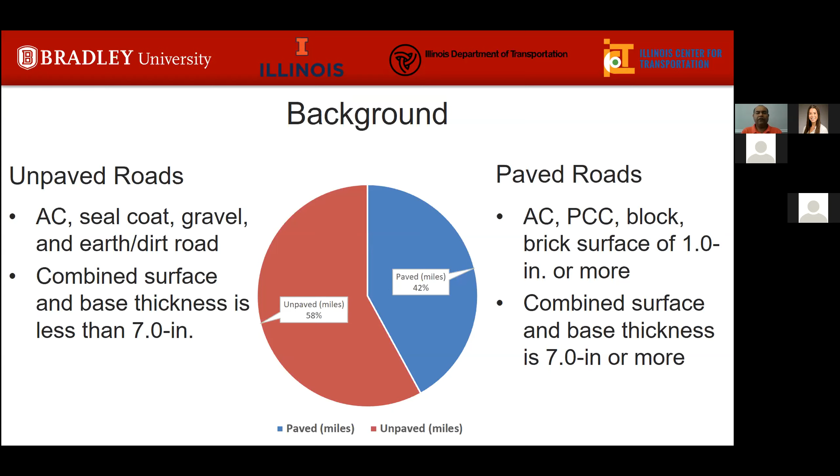If you look at who is maintaining those unpaved roads, mostly county, township, and municipalities are maintaining and taking care of them. About 60% of the unpaved roads are maintained by the townships and municipalities. Just for background, the county engineers actually hold an engineering degree. On the other hand, the township highway commissioners, who are in charge of maintaining the roads, do not necessarily have a technical background, and they are elected. Many of the highway commissioners are retiring and new faces are coming in. So not all of them have the experience or technical background to maintain a road. So this is also a challenge on the highway commissioners front.

So how do they actually evaluate their roads? We did a survey throughout the state for both counties and townships, and we were surprised that most of them do windshield inspection. Basically, windshield inspection is a county engineer or a highway commissioner driving their truck, looking through their windshield and trying to subjectively understand whether a pavement is in good, fair, or bad condition. On the other hand, a few of them are doing manual measurement, basically using an ASTM guideline to find the pavement condition index.

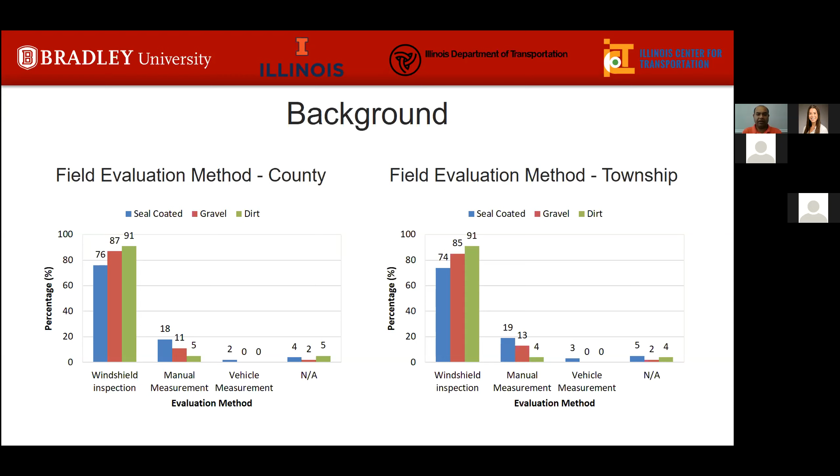Now, when they're doing the windshield inspection, obviously they are driving and doing their other work, and they can actually assess the pavement very frequently. So many of them actually evaluate their roads weekly and also monthly.

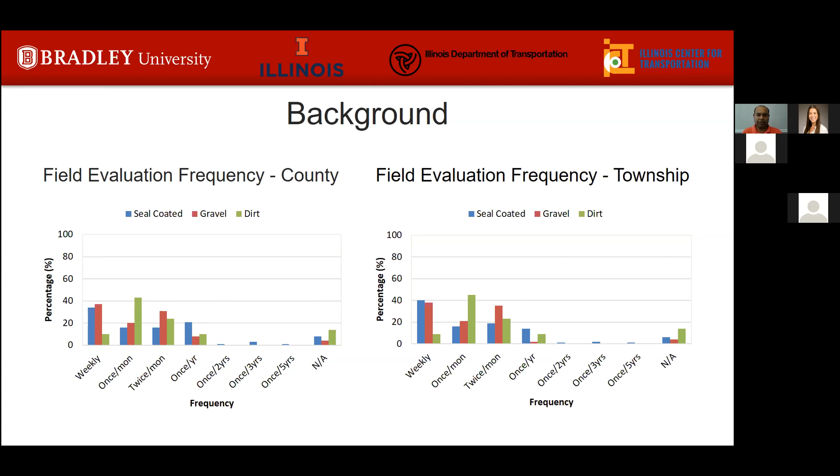That brings us to the objective of the project: we want to develop an index system that is more objective, so a highway commissioner or county engineer can do a physical measurement of the distresses.

And we are looking into seal-coated roads only, because there is already a developed index methodology for PCC pavement and asphalt concrete pavement. So we are going after the seal-coated road only.

And then we use a cell phone app, which is relatively new now, to estimate the International Roughness Index for a seal-coated pavement. So that is the innovative approach we took in our project.

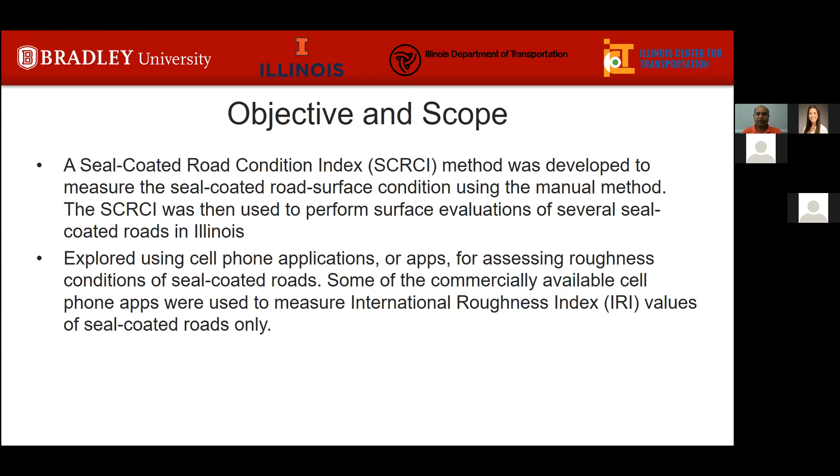So for the seal-coated road condition index, we did not reinvent the wheel. What we did was use our existing standards, but combined them and made them usable for Illinois.

So the method is, there is a standard table that a surveyor will use. It could be a county engineer or any staff from the office who has technical knowledge of pavement distresses. The surveyor will go to the pavement, look at the distresses, and categorize them.

For example, you can see the table here. I have alligator cracking to longitudinal cracking, and how the cracking will be measured. For example, alligator cracking will be measured in square feet, basically taking tape and measuring the area of the alligator cracking.

And then, not only that, they have to come up with a scaling: lower severity, medium severity, and higher severity. Then they calculate the density, which is the amount of that distress divided by the total area of the pavement, so they come up with a percentage.

Using that percentage and the severity level, with graphs already developed by the two standards I'm showing here as reference, we find out the deduct value. Then we do some calculation with the deduct value, using a simple equation to find out the rating.

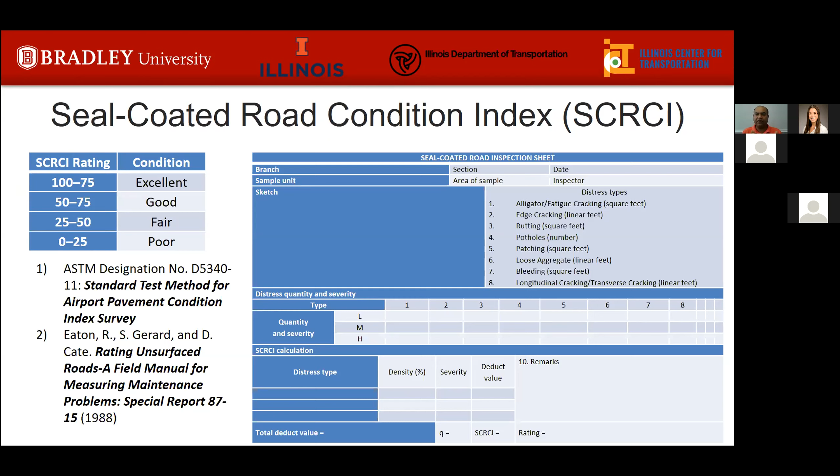So what we did next was develop a library of images for the DOT to understand: for a seal-coated road, which one is a low severity seal-coated road, which one is medium severity, and which one is high severity, considering alligator cracking.

Again, the definition is: when we have alligator cracking and they are not connected, that is low severity. When they are connected and breaking apart, that's medium severity. When we see exposed chips coming out due to the cracking, that is high severity.

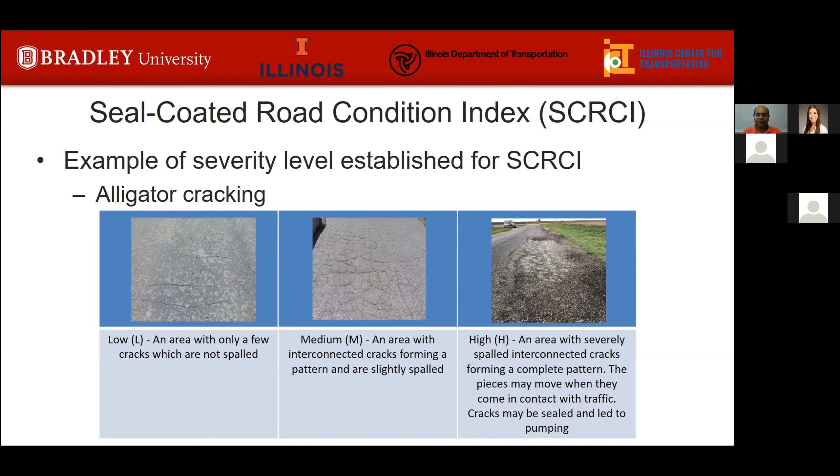So we did that for various other types of cracking. I'm showing you the example of alligator cracking here.

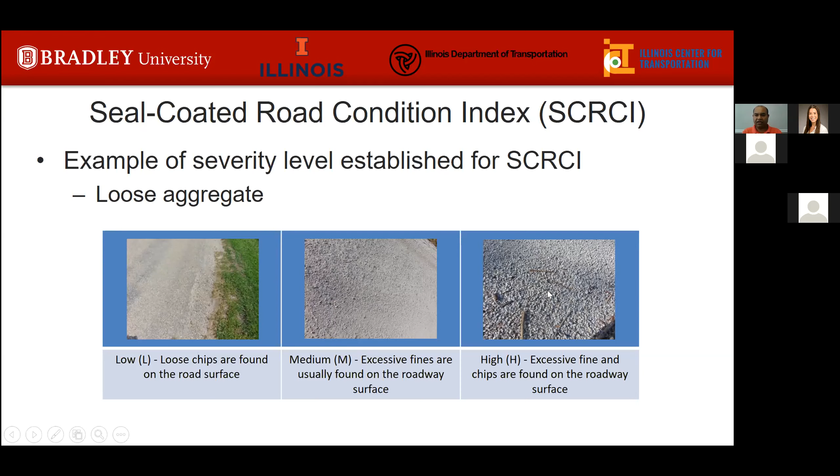The next one is loose aggregate, and this is a severe distress for a chip seal road, because the chips are embedded in the bitumen, but over time, due to the abrasion of traffic, the chips come out from the bitumen or emulsion, and we see loose chips on top of the pavement. The third example looks more like a gravel road instead of a chip seal road, but we see that also in seal-coated roads.

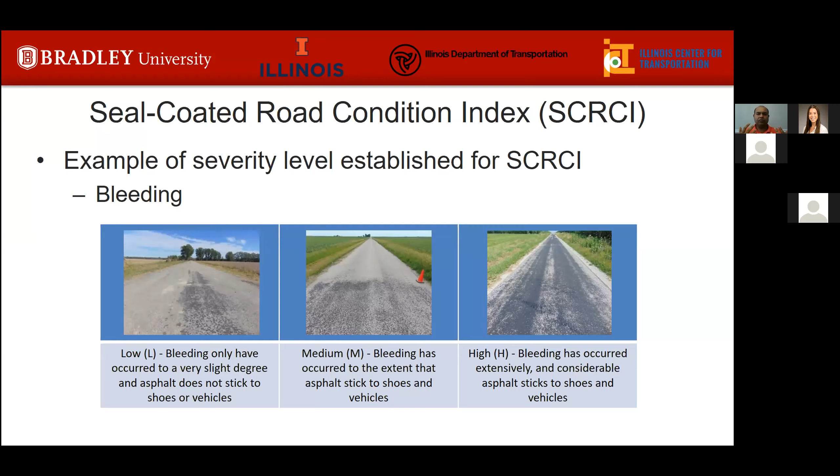So looking at the picture, a highway commissioner can actually understand which type of severity they are finding in their pavement. Another one is for the longitudinal and transverse cracking, even though the mechanics behind them are different. But we don't want to go into that complexity. We just want to make sure there is a longitudinal cracking and a transverse cracking. And when we measure the width of the crack, we can find out whether it's a low, medium, or high severe crack.

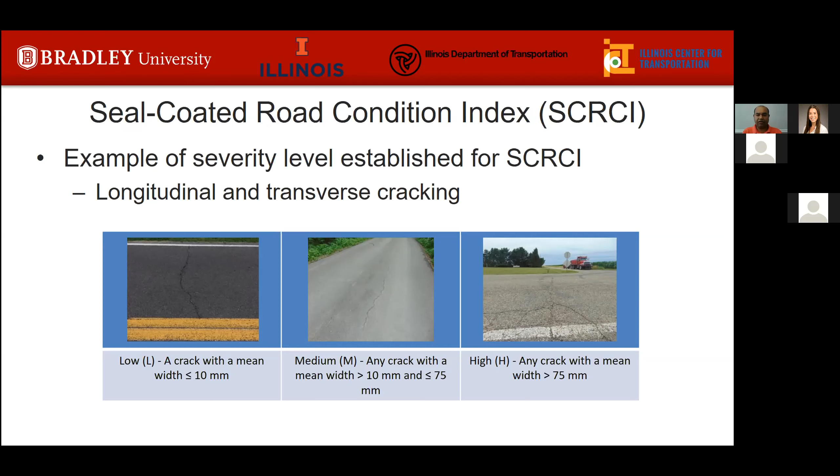So using our own table and our own library, we went back and found the index for a few of the chip-coated roads, and we cross-checked our values with our TRP committee member, which consists of several highway commissioners and county engineers.

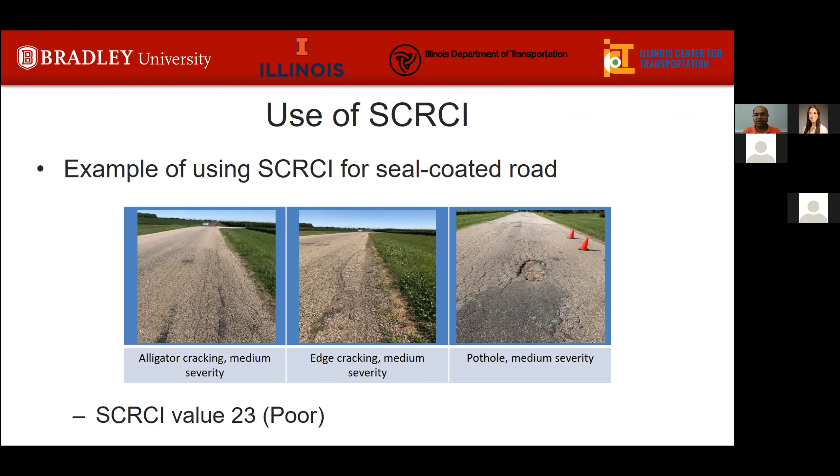For example, this road, we used our library and chart to find out the SCRCI, and we said, okay, this is a poor condition pavement with a grade of 23. We asked, do you think this is a poor condition chip-coated road? We showed our pictures, and they said yes, it's a poor condition road. So definitely we need to fix it.

So again, considering the limitations of that, the manual method is time consuming. It is also labor intensive, and if some of the chip seal roads have very high volume of traffic, we actually had to do a lane closure to take the data. So there are various limitations in this method.

So how can we actually improve our data collection procedure? As part of the innovative approach, we used cell phone apps to measure the international roughness index. Again, we did not develop the app ourselves. We used already professionally developed cell phone apps that we can either buy or subscribe to from the marketplace. We used three different types of apps: Roadroid, RoadBump, and TotalPave.

All three of those apps are available right now only for Android-based cell phones, not for iPhone or iOS devices. All three apps use the sensor inside the cell phone that records the vibration of the vehicle when it is driving, and use equations to calculate or estimate the IRI. So the fundamental is the same as the IRI measurement for any high-end device using vibration.

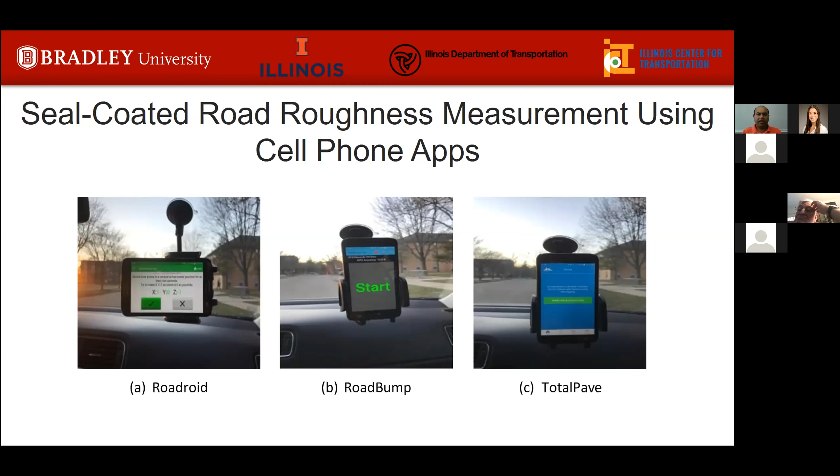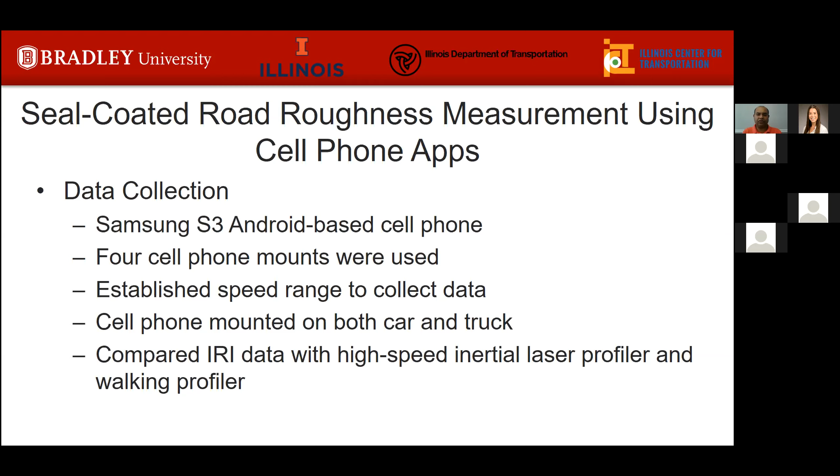So for our project, we used one Android-based cell phone, a Samsung S3. We used four different types of mounts to check the variability of our data. Then we established a speed range that gives us consistent data, and used both a sedan car and a truck while collecting the data. We also compared the cell phone measured IRI with a high-speed inertial profiler and a walking profiler, to see how they vary compared to industry practice devices.

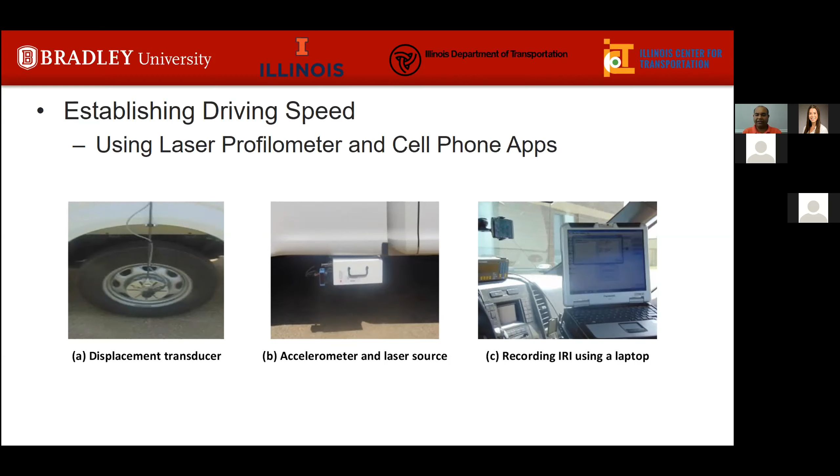This is the laser profiler used by IDOT. In the middle picture, there is a laser source that shoots a laser beam onto the pavement. When the truck is driving, the laser beam goes up and down depending on the undulation and cracks in the pavement, and it accumulates all the undulation or vertical difference values divided by the total length of the measured pavement, and that gives the IRI value. The data is collected automatically into a laptop, so we can get the data right away after we collect it.

So for our first trial, we used a chip-coated pavement. The laser profiler was already set up in a truck, and we drove starting from 40 kilometers per hour up to 90 kilometers per hour.

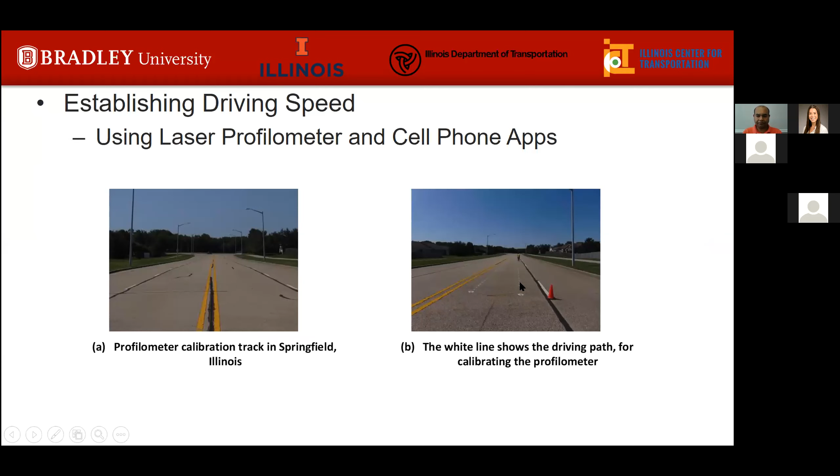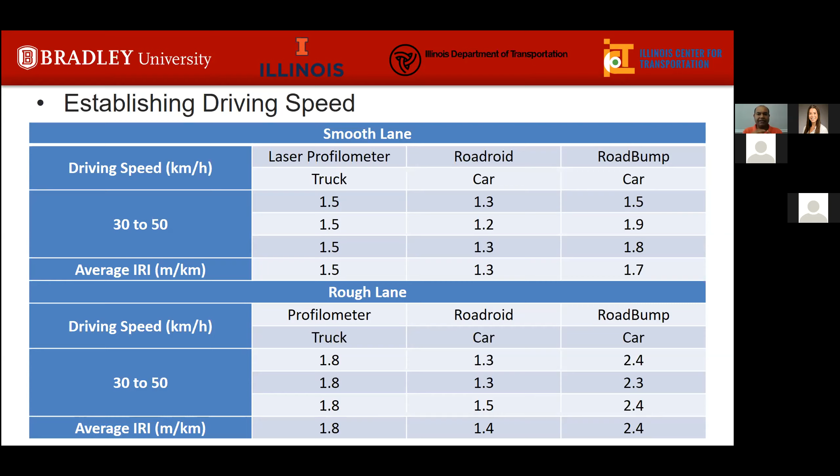So you can see over here for the laser profiler, it is 1.5 and 1.8, comparing the value, higher value for the rough lane. For the Roadroid, again, 1.3 and 1.4, again showing a higher value for the rough lane. For the RoadBump, 1.7, 1.7, and 2.4, also showing a higher value for the rough lane. So we can actually assure that, okay, at least they sense the smooth surface and the rough surface.

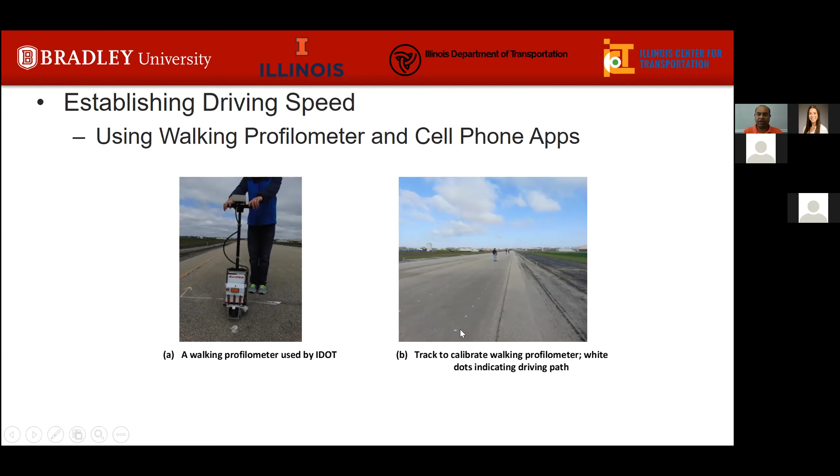Next, we did another trial with a taxiway in Rantoul Airport, and we compared our Roadroid and RoadBump data with the handheld laser profiler. Again, it has a rough lane and a smooth lane, but also you can see the dot line over here. This is the line that we use to drive our car and also the handheld device.

Again, for the walking profiler, it can definitely sense the smooth lane and the rough lane, 1.8 and 4.7. On the other hand, for the Roadroid, the average is the same, 1.3 and 1.3. For the RoadBump, it senses 2.7 and 3.7, so it shows a higher value for the rough lane.

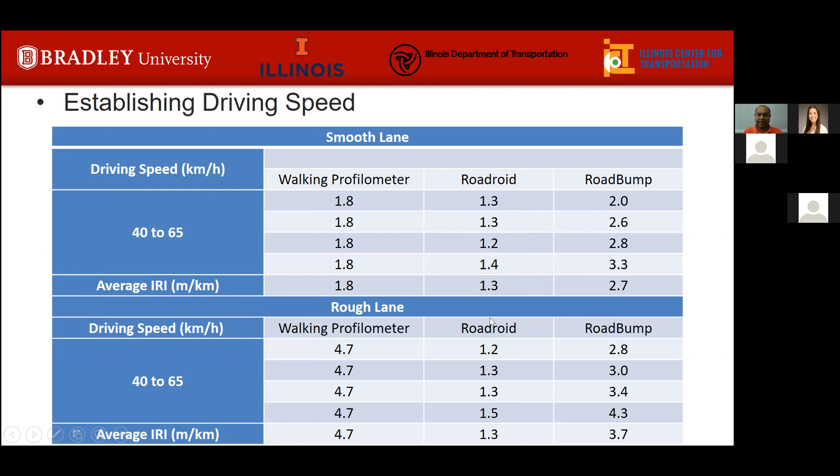However, you can see that for the Roadroid, the value is more consistent compared to the RoadBump for both the smooth lane and the rough lane. So there are some variabilities we surely see in the data.

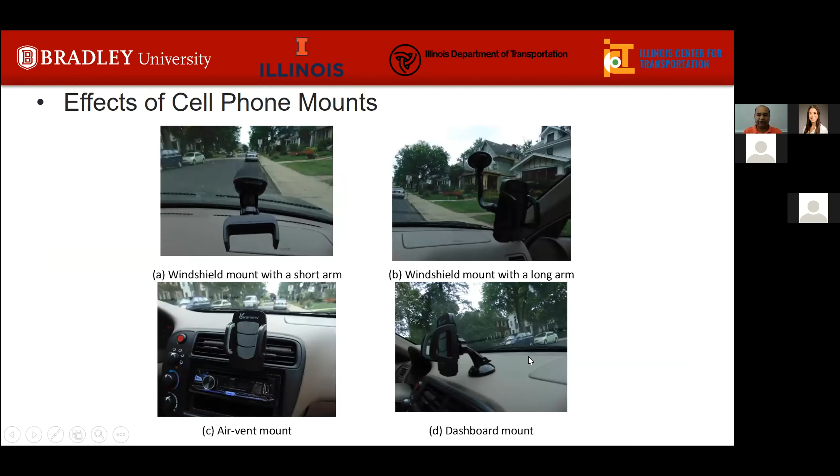So next we did a test on 4 different mounts, where you have a short arm mount and then a long arm mount, windshield, and then the air vent, and then we have the dashboard, the conventional dashboard mount.

What we have seen here is that for the windshield mount, sometimes the phone dropped from the windshield because of the vibration. Comparing all those 4, the dashboard mount was more consistent. It was not actually falling off from the dashboard while we were taking the data.

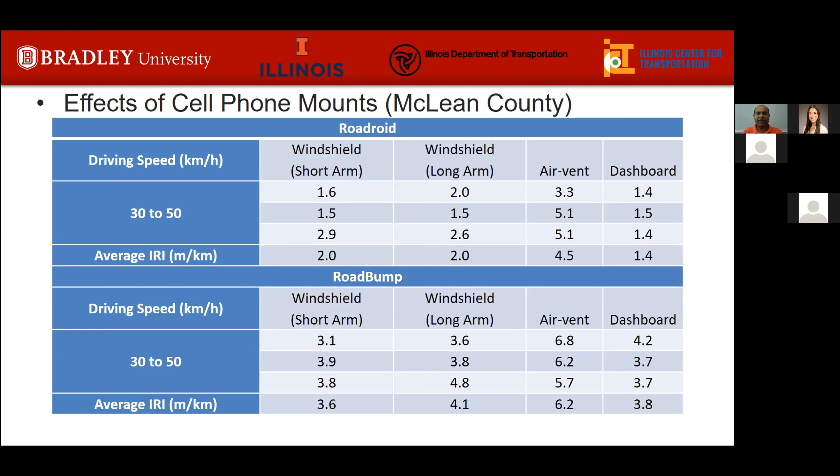So we did that for many roads over here. The next one is for McLean County. We did for all 4 mounts over here.

And then we collected another round of data, and we have seen that some mounts show a consistent result, and some mounts do not show consistent results. But we also have to think about the convenience of taking the data. If the mount is falling off from the windshield while we're taking the data, that is not convenient. So we actually ruled out the windshield mount from our next data collection.

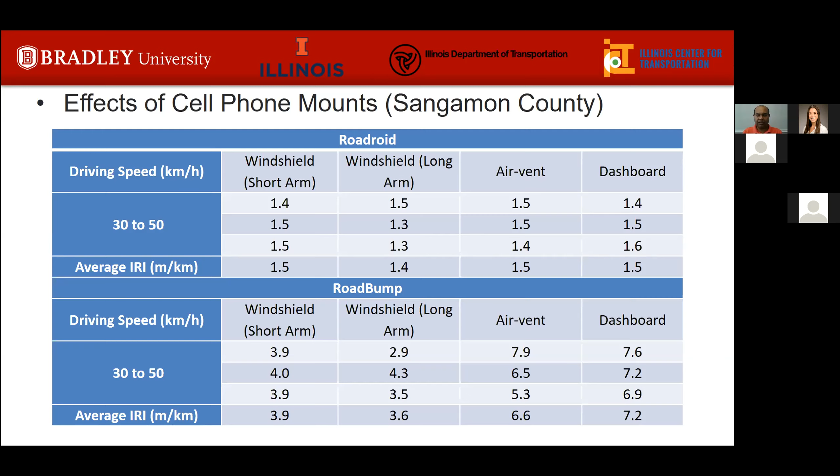So we use the dashboard mount. After narrowing down our speed range and the mount, we then used all 3 types of cell phone apps to collect the data.

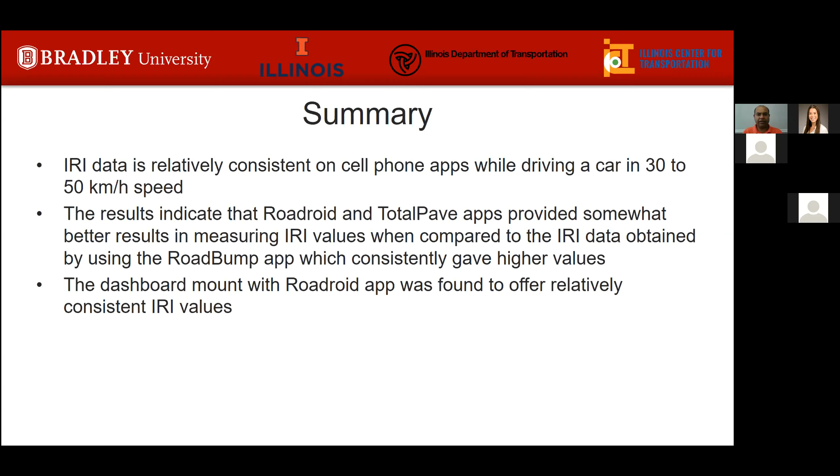So we summarize that we can get consistent data if we drive a sedan car or truck at 30 to 50 kilometers per hour. Road droid and TotalPave are more consistent and comparable with each other, and RoadBump definitely gives us an overestimating value. The dashboard mount is more consistent because it is not falling off while we are driving. So we use these three for our next result.

The opportunities now coming in the future: we started collecting data for the counties. Right now we are using Roadroid and the dashboard mount, with two cell phones. For Peoria County, we used that data collection last year and got some promising, very good results for both cell phones and the Roadroid we're using now. We are doing the same for 80 more miles of data this summer.

I know there are two more counties who also showed interest in using the apps and cell phone measurement to take their IRI data for the whole network. We still use the manual data, but I think there are opportunities in the future to use the app and take network level data. For more project level data, we still need to use our manual method.

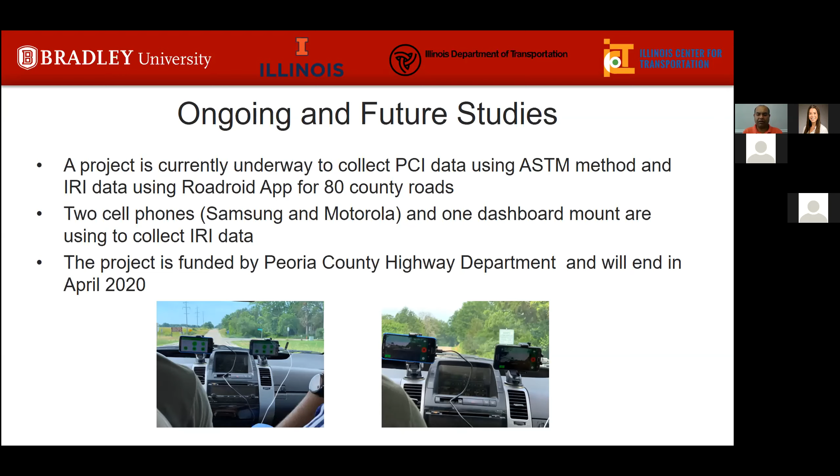So I want to end my presentation here. I'm open for any questions, and thank you very much.

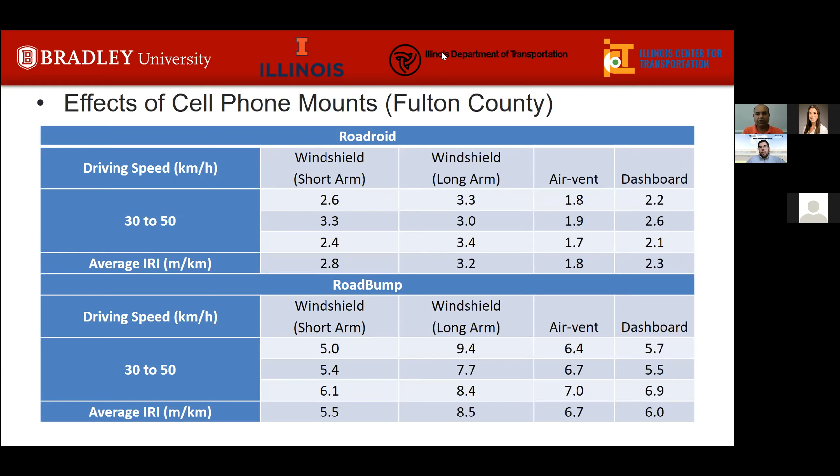Thank you, Javier. Everyone, it's great to see such a robust crowd, albeit virtually, for these talks. It's greatly appreciated, and I'm going to try to do this. I know Noel will help me if I stumble, so I pulled up. We'll see how adept I can be in getting this off the ground.

Just bear with me for a second. I'm just looking for that presentation.

Oh, there it is. I think you're seeing the thank you slide first. Correct. And that's not a bad way to start.

This particular project and the subsequent paper that we presented to the TRB audience, the Transportation Research Board, is what I'm going to share with you today. I'll try to get through it as quickly as I can so that we can have some discussion if there needs to be one.

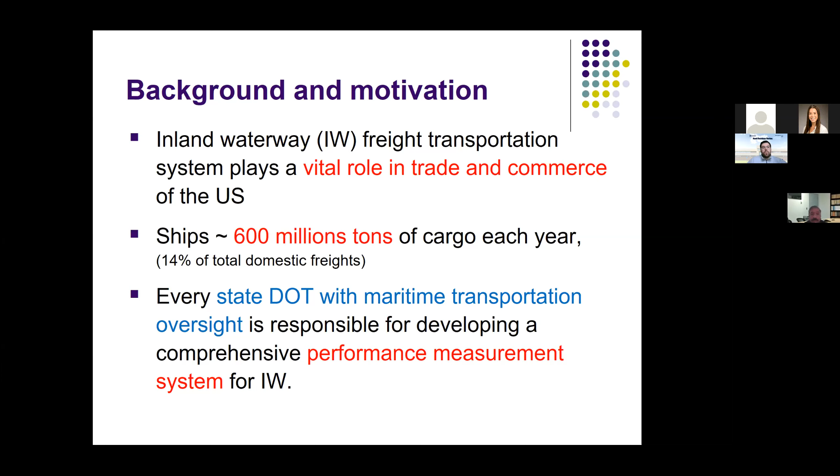With that level of importance, we assume that every state would have a very formal mechanism for overseeing this. Every state is charged with providing oversight and developing a comprehensive performance measurement system for the inland waterways in their respective states and the waterways they have jurisdiction over. How that comes about in practice is what we were curious to know about.

Our task, as I mentioned, is to develop a set of performance measures to track the relevant data and how we can then proceed from that point on.

In order to help us shepherd this process along, we engaged in 3 distinct clusters. One was to summarize the state of the research. Two was to develop and recommend a systematic approach for performance and their tracking. And then, if there are any benefits that will accrue because of this structured plan, that is also something we are curious to know and document.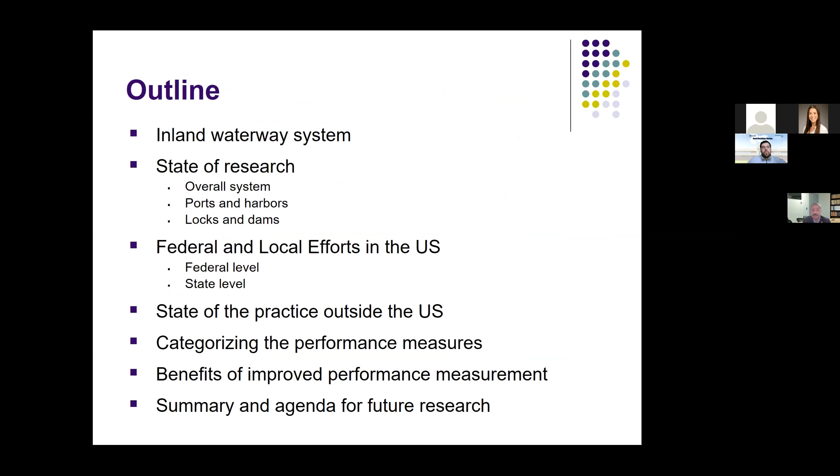That's the backdrop. The outline for this talk — we'll navigate through this as I go through each of these slides, but that gives you a sense of what I'm trying to convey here.

The inland waterway system — I talked about it in big picture terms, and this slide offers more specificity. Nationwide it accounts for about 36,000 miles of waterways. Commercially, about one-third of it is used for navigability purposes. 38 states are directly linked by these navigable waterways and served by them.

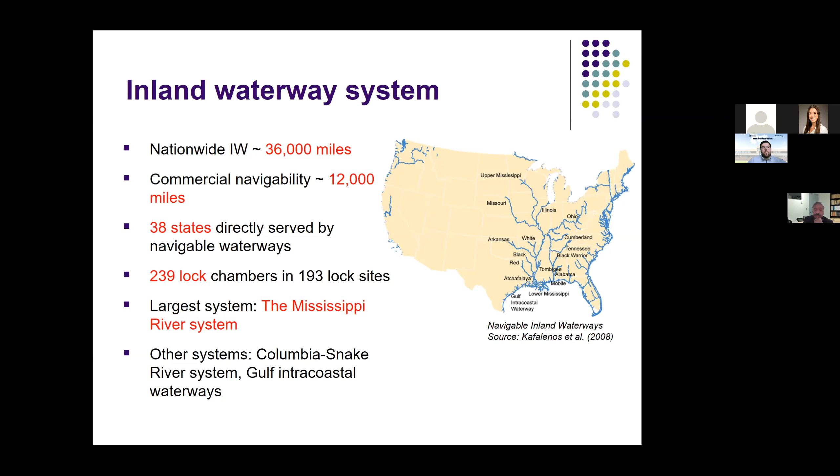The elements of the waterway system: locks are the essential elements, with 239 lock chambers in 193 lock sites, the largest system being the Mississippi River system that touches us. Then there are other various systems — the Columbia Snake River system, Gulf Intracoastal Waterway, and a variety of other things you can also see on the map on the right.

Before getting too much into the weeds here, I also want to make sure that we cover what the elements of the inland waterway system are that are essential. And this picture really nicely encapsulates all of the functional components.

We have two, and I don't know whether you can follow my cursor. If you're not able to, let me know. I'll try to see if there is another mechanism to sharing my cursor. But if you are able to, then I'm pointing to the water. Excuse me? We can see it perfectly.

Perfect. All right. So you have the water side and the land side division that is essentially segmenting the components. On the water side, you have the vessels, their maneuverability, the locks and dams that control the flow, and then the cargo loading and unloading, at least a portion of it on the water side as they approach the ports.

And then on the land side, you have the port facilities, which also overlap into the cargo loading and unloading. And you have the terminal operations and the access to road and rail and pipelines from where they get to be moved on surface to various other destinations around the country for that matter.

So this line, the vertical line that you're seeing, the divide between the water side and land side, is where the intermodal activity happens. And that also could be a way to delineate where the responsibilities end and start for various entities that are part of the inland waterway system.

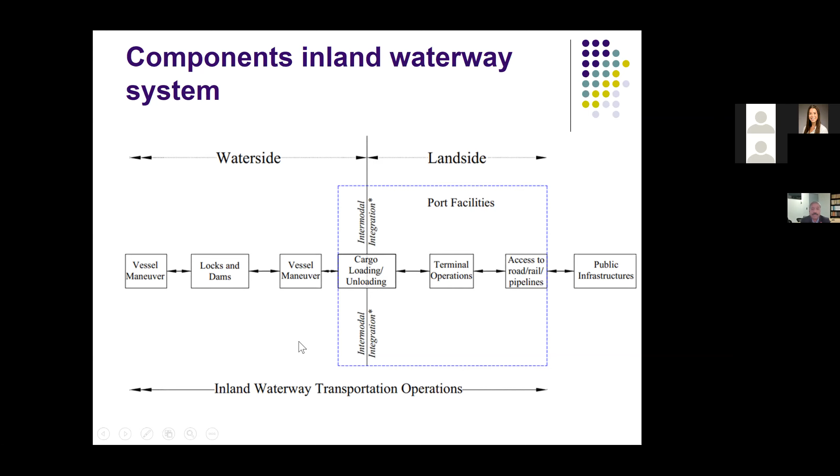In order to give us a better sense of understanding, we wanted to make sure we studied these components based on what the literature has talked about, what some of the agencies and administrative entities have reflected on, and the quick recap, the status of the inland waterway system components. I would like to draw your attention to the highlighted areas and the ones in the blue. The impact of discrepancies as it pertains to resiliency and risk analysis and their interdependency with the waterway infrastructure.

As far as safety and security are concerned, there's legitimate issues pertaining to theft, pertaining to spills in the water system, and any issues that are either pertaining to the commodities themselves or to human beings. There's a variety of things that are in the safety and security aspect. There's a lot of questions about the sustainability. This also ties in the funding

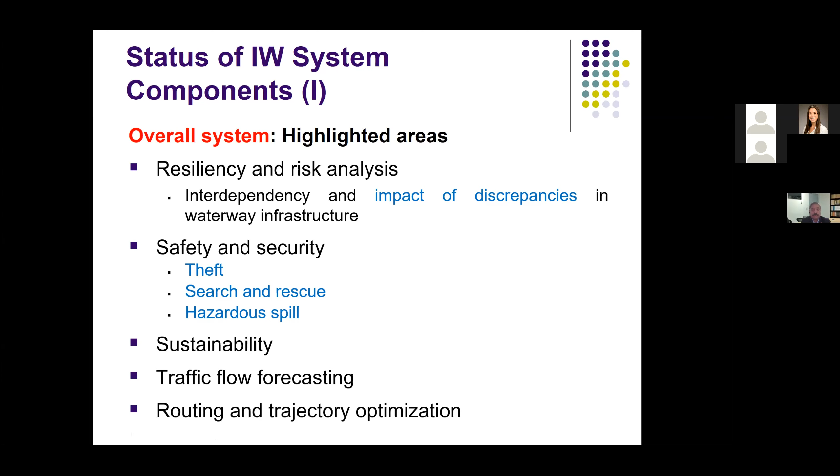issue. There should be, whether there exists, a traffic flow forecasting mechanism, and how well the routing and other associated details are subject to any optimization principles, or is it just by the seat of the pants, if you will. So those are all important questions that need to be answered.

And especially when you look at the ports and harbors, what we saw as it pertained to the literature was there were two segmentations of the performance measures, one pertaining to the financial component, the other pertaining to the operational. The operational is pertaining to all the traffic that comes in and other associated details. Financial is how do they make do with the limited resources that they have. There are some environmental performance measures, but not very well documented.

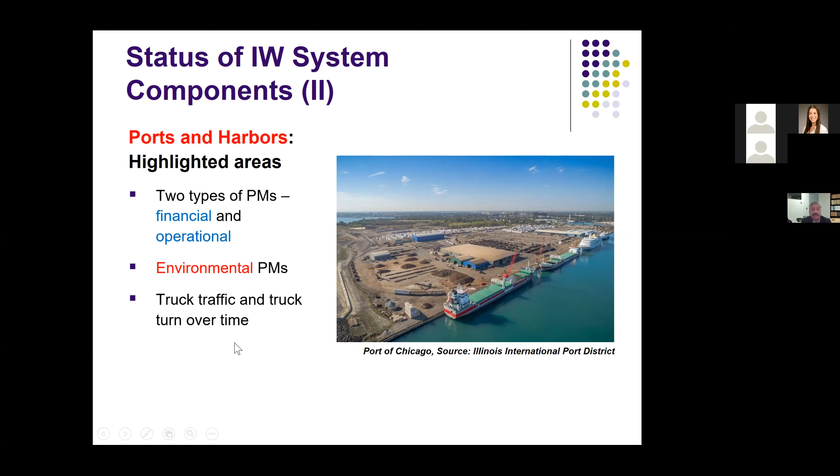This third bullet point, the truck traffic and truck turnover time, is the one that is cited most in the literature. And we were also very curious as to whether that reflects itself when we go around talking to the port districts as we are doing now.

The locks and dams, which are under the control of the Army Corps, are also in need of a financial boost, as we found out in the literature. Aging and deteriorating infrastructure. There is a desperate cry for funding for maintenance of these facilities. There could always be a lot of issues pertaining to whether the structural design can be improved upon.

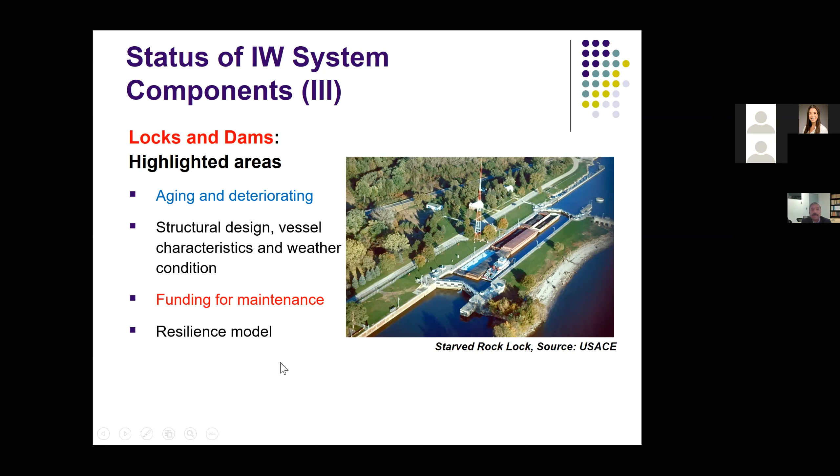Can there be uniformity in terms of the vessel characteristics? Can there be any standards that can be brought into this domain? How susceptible are these to weather issues? And how does that tie into any resiliency of these? These are also much needed thoughts that are discussed in the literature. There are no immediate solutions that have been bandied about, but at least they are acknowledged.

Administration and government needs to focus on. That brings us to the feds. And the federal role is a very, very high level role. So the US Army Corps, I touched upon a couple of slides ago, pertaining to their role as it pertains to the locks and dams.

Army Corps is in charge of constructing and maintaining navigation channels and harbors, and also in regulating the water levels on inland waterways. So those are the twin functionalities that they have on paper. And they also have another functional element, which we'll get to later on in the presentation. But the Coast Guard, their duty is well understood: safety, security, and stewardship of the entire waterway system in the nation, not just the inland waterways.

And MARAD, of course, is the governmental arm, the administrative arm. It supports ships and shipping operations, ports and vessel operations, and they strive to achieve multimodal integration. Now, their role is much akin to FTA on the transit side, because they are very, very superficially involved in the day-to-day activities, as opposed to something like FHWA or FRA, which have more in-depth understanding and involvement with the systematic components.

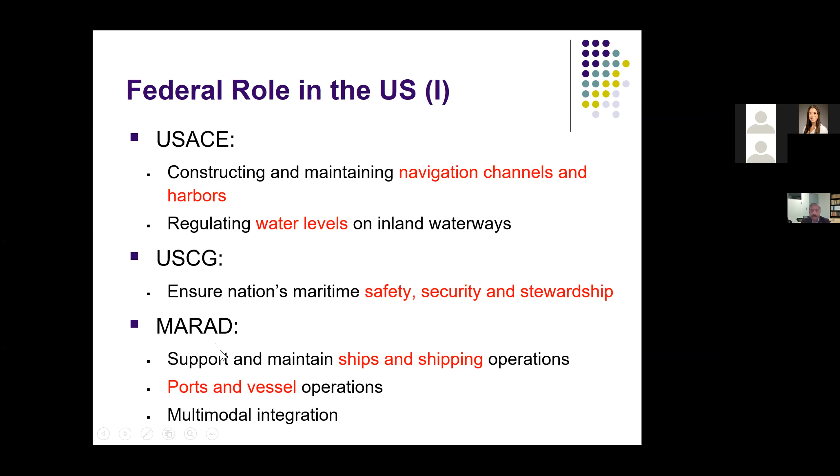Other efforts at the federal level in terms of the performance measurement systems. There's a national level committee, the US Committee on the Marine Transportation System, that has been involved in understanding the importance of performance measures. The Army Corps itself has identified 17 major maritime performance measures, and also has put together the Waterborne Commerce Statistics Center, that is a dissemination source for data and performance measures. MARAD, in their own way, have identified performance measures to track maritime, right? Container terminal productivity. And then also involved in influencing vessel calls at US ports and terminal facilities.

As you can see, there are a lot of players that are involved, but apart from the Army Corps, there's not been any very substantive directionality that has been provided as it pertains to performance measures. So it's a very often overlooked, underappreciated aspect. On the highway side there's the Highway Capacity Manual. You have all the metrics that are used to understand congestion, safety. On the waterway side, there's a lack of that sense of understanding, be it by design or by chance. A lot of it points back to the funding issues.

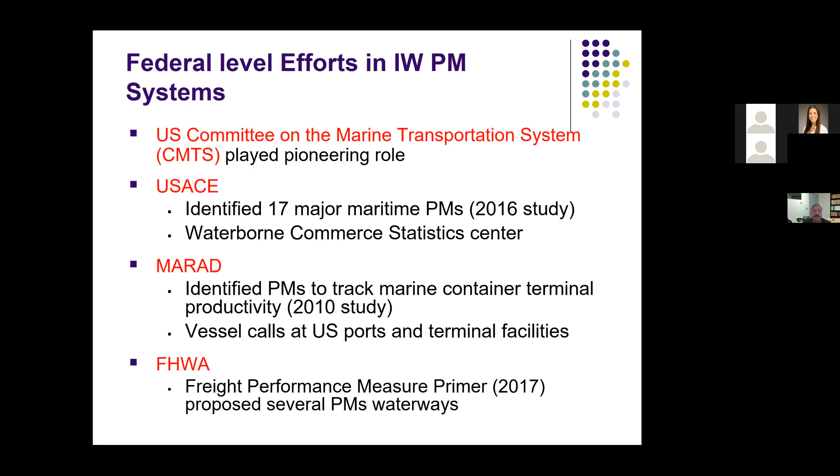FHWA, for its part, as it pertained to the land side, the freight performance measure primer proposed several performance measures for the waterways. And so those are all things that we found that have been discussed. It still doesn't showcase the ideal database or the ideal set of performance measures that can be used.

So when we got this big picture understanding of the federal involvement, we started doing a scan of state level practices. As I mentioned at the outset, there are 38 states that are touched by the navigable waterways in the country. We looked at the state freight plans, the maritime freight plan or strategy if it existed, any periodical performance review report, and other reports that were pertinent to the maritime and inland waterways in respective states. So this was a web search, calling people and finding out if they can point us to any documentation.

As of last year, 44 states had published a state freight plan, 44 of the 50, and that includes the 38 that we were focusing on. The state freight plan is the broader freight plan, not just for the waterway system. This is including over the road and other mechanisms. 32 states were selected out of this 44 for review based on the following three criteria: availability of a state freight plan, whether they had a maritime or inland waterway freight functionality, so out of the 38 that were served by the waterways, 32 were selected, and also based on the annual tonnage. So did they handle enough tonnage for us to look at it critically? Those were the criteria that we employed in identifying the 32 states.

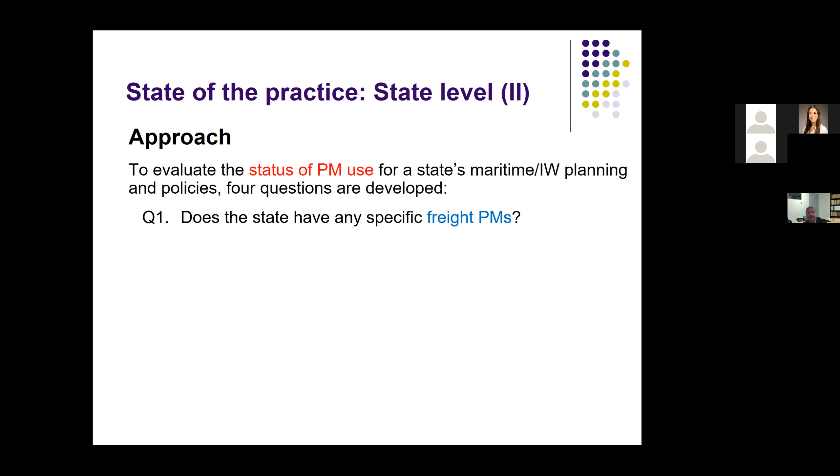And in order to further dive into these states and their documentation, we asked four questions. Do the states have any specific freight related performance measures? Do they have any specific maritime performance measures? How many of those performance measures in the maritime bucket are discussed or reported? And are these performance measures included in the state freight plan or in the maritime plan for that particular state?

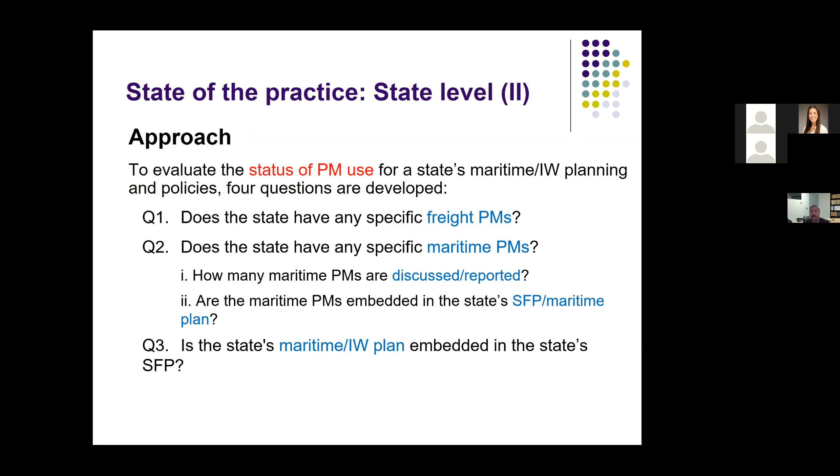As you can see, discussed as it pertained to the documentation or in the performance report card, if they have a performance report card, those were things that we were taking account into. Is the state's maritime plan embedded in the state freight plan? So the nexus between the freight plan and the maritime plan is also something we were very curious to find out, because that could help IDOT, who's the primary beneficiary of our work, to incorporate any such best practice into what they are getting started doing.

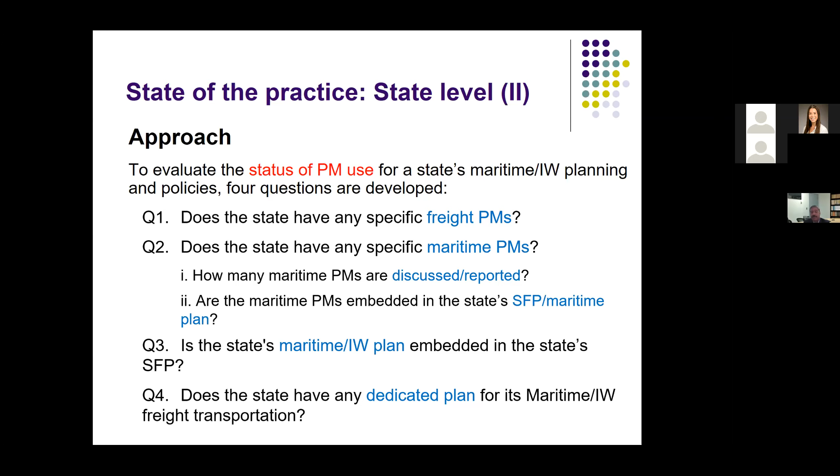Does the state have any dedicated plan for its maritime freight transportation? So all of the questions are very specifically addressed and look in understanding how integrated the maritime plan, if it existed, was with the freight plan for the state. If there was a maritime plan, were there any performance measures that were included? So this is a quick recap of that scan.

So we had 27 states that had a performance measure for freight in general in their state freight plans. 12 states discussed the inland waterway performance measures. Every state's maritime and inland waterway plan is embedded. So whichever state had a maritime plan, they managed to fuse it with the state's freight plan. And 6 states have supplemented the inland waterway strategic planning effort with a freestanding planning document. So they went above and beyond their original goal of fusing it, so they had a very specific individual maritime plan.

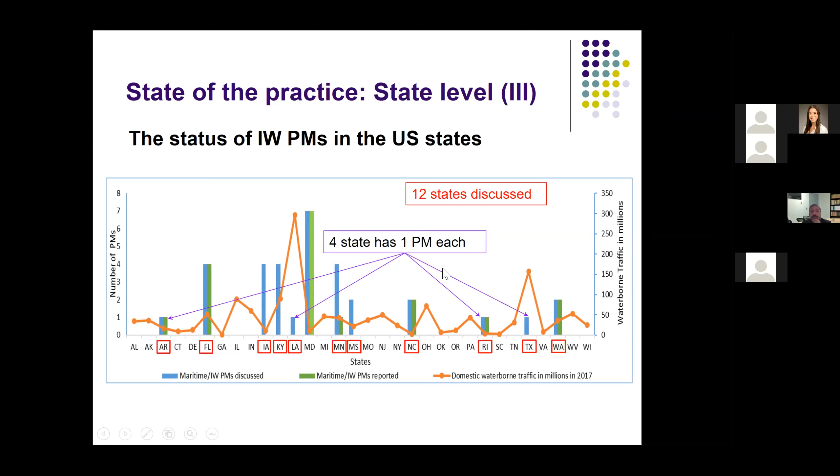I think we lost Sriraj. Is anybody else hearing him? No, I'm not hearing either. I can't hear. Yeah, I think we lost the speaker. I'm gonna give him some time to see if he can reboot and reconnect again.

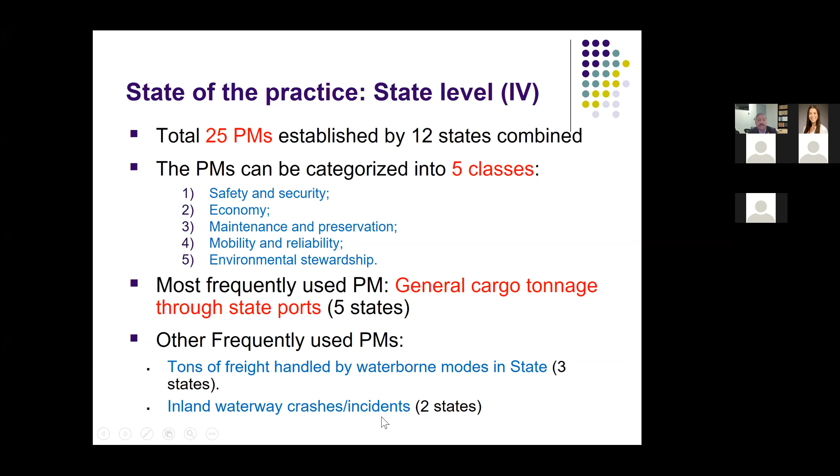It's a mixed bag. Of the 12 states, only 5 were using cargo tonnage. 3 were using the tons of freight, and then, of course, safety measures of inland waterway crashes and incidents. Only a couple of states were using it. Other highly discussed issues in maritime plans: they talked about delays in locks, the dredging that is needed of channels to maintain navigable depth for their barges

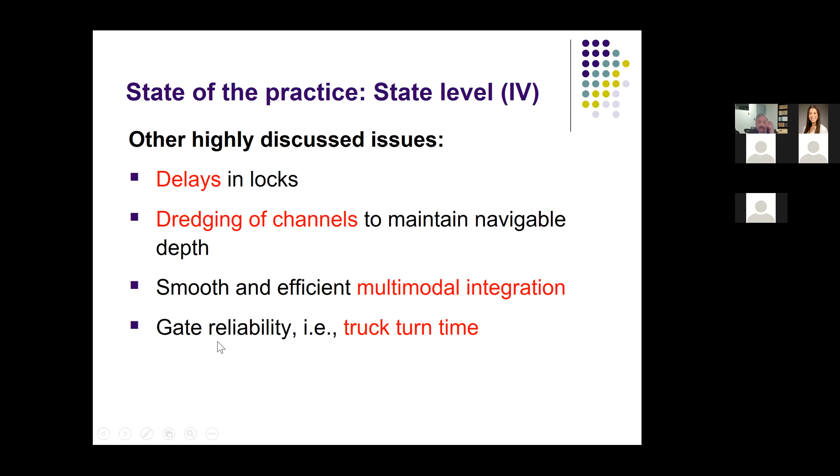and ships. Smooth and efficient multimodal integration is an aspect that they strive for, especially as it pertains to the transition between the water side and the land side components. So loading, unloading, and then transporting from thereof is something that has been an issue. Reliability of the locks and gates, the truck turn time is also a major issue that was indicated. How does it reflect when we go outside the boundaries of this country?

And then we found this particular document that was very useful for us in getting a snapshot of what is happening around the world. The Permanent International Association of Navigation Congress came out with a report in 2011 that identified 35 performance measures, mainly focusing on European waterways. And there was an EU-funded project on NEWADA Duo, focused on performance measures as they pertained to the Danube River in 2012.

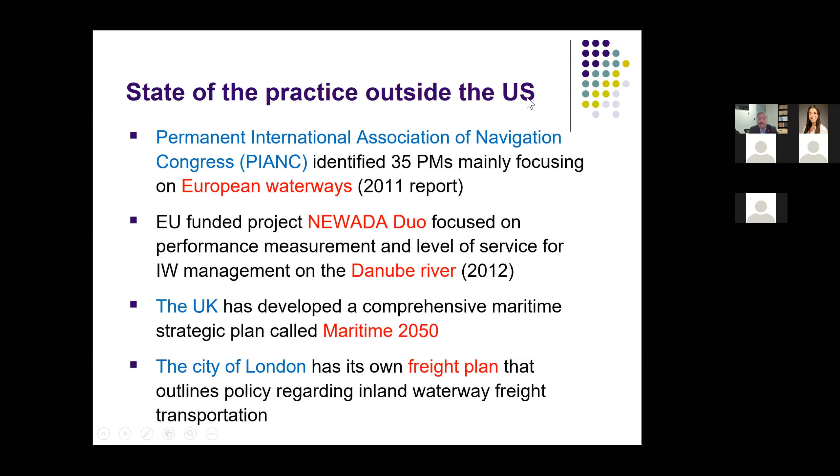Other mechanisms: the UK has developed a comprehensive maritime strategic plan called Maritime 2050. And then the City of London has its own freight plan that outlines policies regarding inland waterway freight transportation. So there are enough instances of this happening around the world. And then the question for us, as we've looked at the states, we've looked at other countries, is how do we categorize the performance measures? And that's a major challenge for us.

We have to identify the system deficiency, identify the performance areas that need improvement, categorize the infrastructure assets, and then ensure the selected performance measures allow for efficient allocation of resources, right? The allocation of resources will drive most of this. The common practice being adopted now is strategic goals of freight modes. That's essentially what most entities try to do. And so we took a preliminary look at how we can segment this, the water side and land side components. You have the navigation channel, locks and dams, intermodal integration, and ports and harbors on the land side.

Then the 5 classes of clustering: safety, security, maintenance, preservation, system resiliency, mobility, congestion and reliability, environmental stewardship. On top of those 5, we added economic development, information and communication technology, and customer service as ways in which we can identify performance measures.

What are the purported benefits of these performance measurement systems? DOTs can benefit by prioritizing projects and using available funding, if there are any funds available, in an efficient manner. They can also help state DOTs draw up a complete and comprehensive strategic transportation plan, because every state produces a transportation plan once every few years. The inclusion of the inland waterway system will only make it more robust and present a more complete picture. There's a proper mandate for this, because you cannot necessarily go to the feds or the state for funding unless you can document that your system is in dire need of funding.

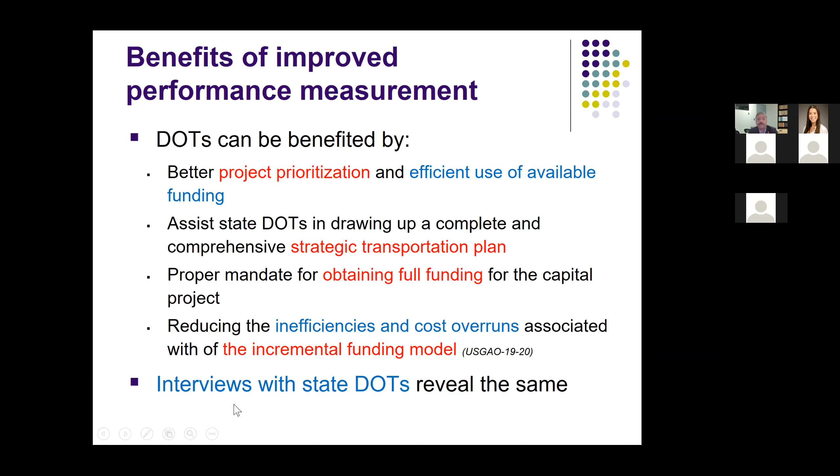We have also done interviews with state DOTs that reflect more or less on the same issue. The state DOTs are staffing at least a half full-time equivalent, or one at most, in terms of dedicated personnel for looking at the inland waterway system. There is hardly any dedicated funding for the inland waterway system, which is not any dissimilar from what we have in Illinois. At least with the recent capital bill that was passed, there seems to be an infusion of funding, at least a one-time infusion, into improving the inland waterway system. So those are all good aspects that I would like to highlight.

At the same time, the water freight performance measurement system is far from being mature as it pertains to inland waterways. The limitations are the funding that I talked about. Data are just not available. Currently, we are doing a survey and also doing interviews with port districts and carriers. There's not a lot of understanding of the importance of data, or there are not a lot of resources available to catalog the data and use them for tracking performance.

So the onus falls back onto the states to pay attention to the needs and challenges, because if not for the inland waterway system, the transporting of goods may assume more criticality, since you'd be dependent on a couple of different modes. States should draw insight from existing research and practice. That's what we are doing currently in assisting ICT and the IDOT folks. It should be used to build a proper performance enhancing model that will address the overall improvement of the system.

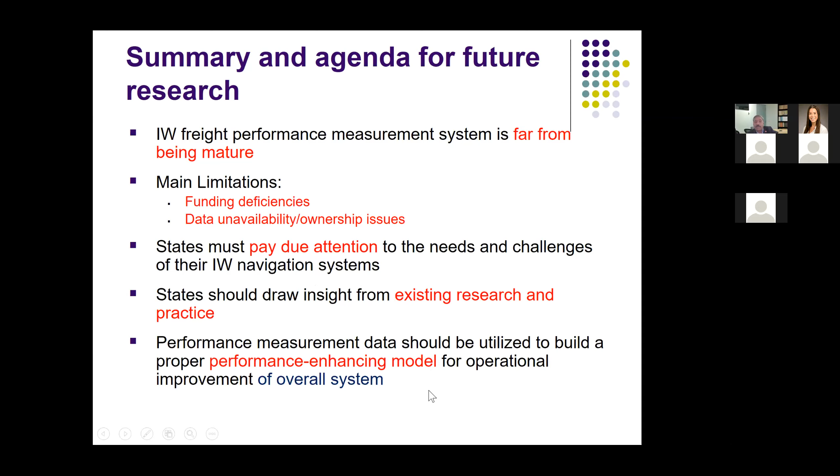And I know I rushed through all of this. This is definitely not the entirety of our project, but this is what we presented during TRB. There is a subsequent presentation that we made to the technical review panel, and that's also available that we can share with you. But I'd be happy to answer any questions. I know it was disjointed because of the disruption on my end. Apologize for that, and I'm happy to answer any questions.